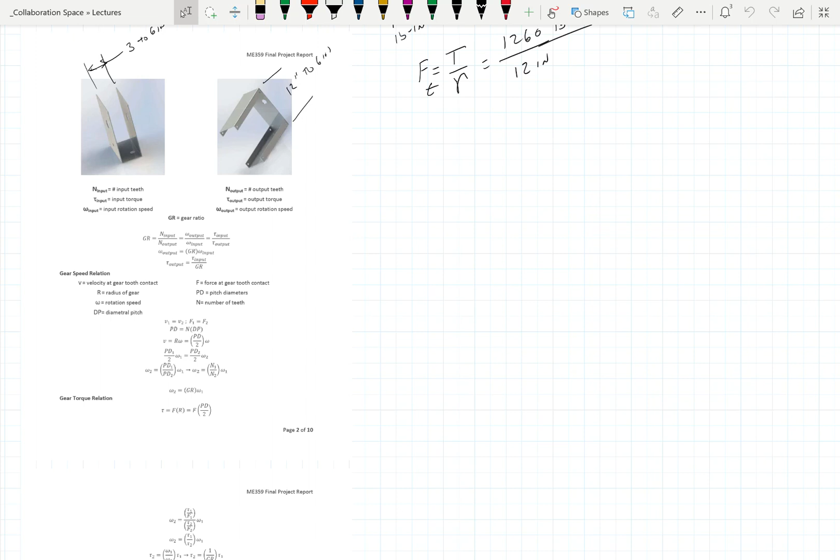I want to do a class like that. All right, so we're good, we got our force. Let's go back to the picture here, so we're working on.

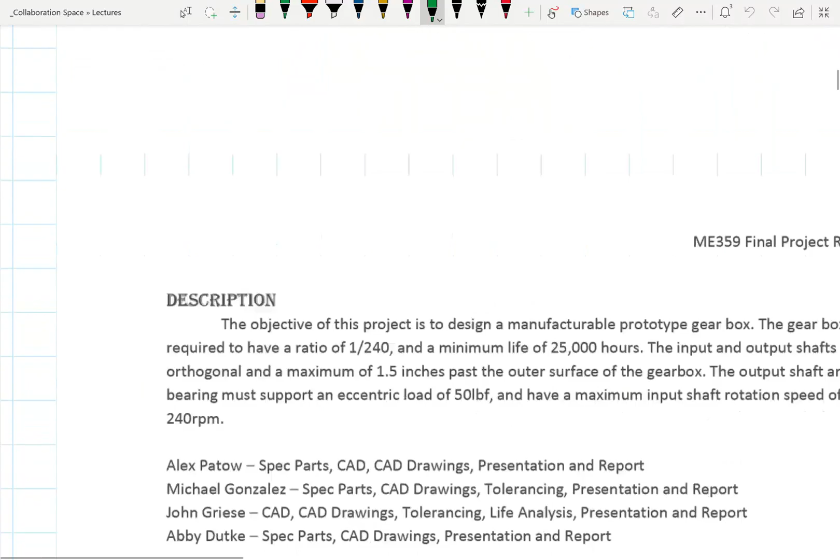Whoa, where'd you go? That was fun, so we can stop it. Spreadsheet's doing something too. We can chalk off that gear, we know what we're going to do with that now, right?

Okay, we got to come up with a bearing. Actually, we got to come up with 2 bearings, one here, one there. That also means we got ring grooves to worry about.

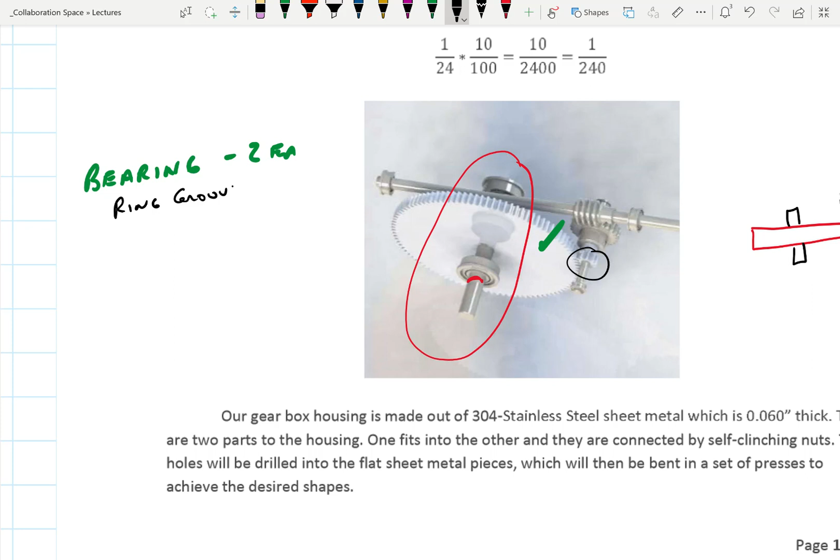The gear has a key and probably a set screw. Actually, I don't think that particular gear did. Didn't, no. Oh, that would suck. What else is missing here?

And then we got the shaft design. We're still at just kind of picking general sizes of things. We haven't gotten to calculations yet. We've been toying around a bit with calculations, trying to figure out the pitch diameter and diametral pitch and number of teeth, but nothing really towards the design itself.

So the next piece would be... okay, who keeps pinging me?

No keyway, no set screw. No keyway, no set screw. How do they plan on putting that bloody thing on there? On the gear that we picked? Yeah. Well, let's just put a keyway in anyways, because that would just be horrible otherwise.

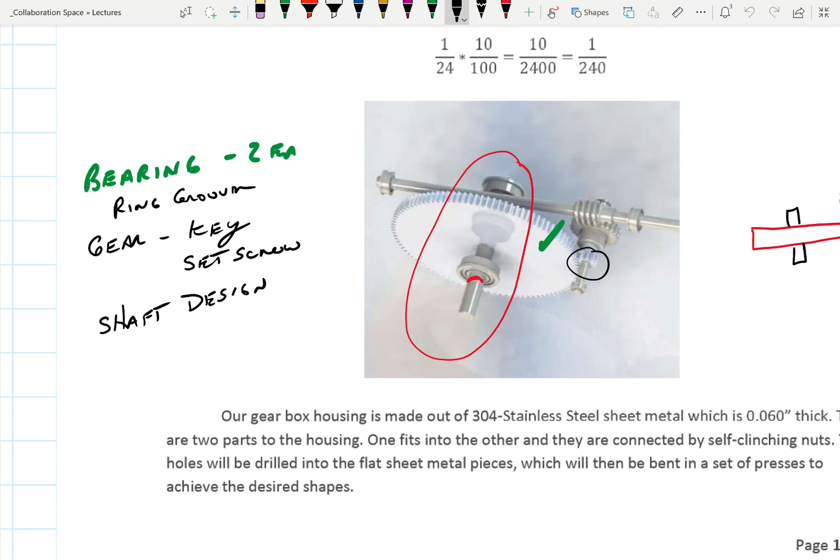How about that? Okay, so basic assumption on a gear. Somebody write this down, better be me, since everybody on the other end can't see anything. So, where are we here?

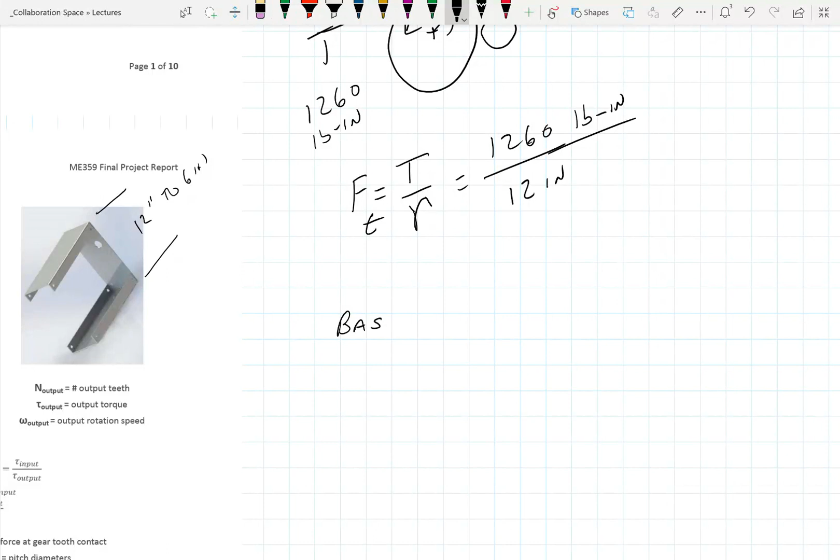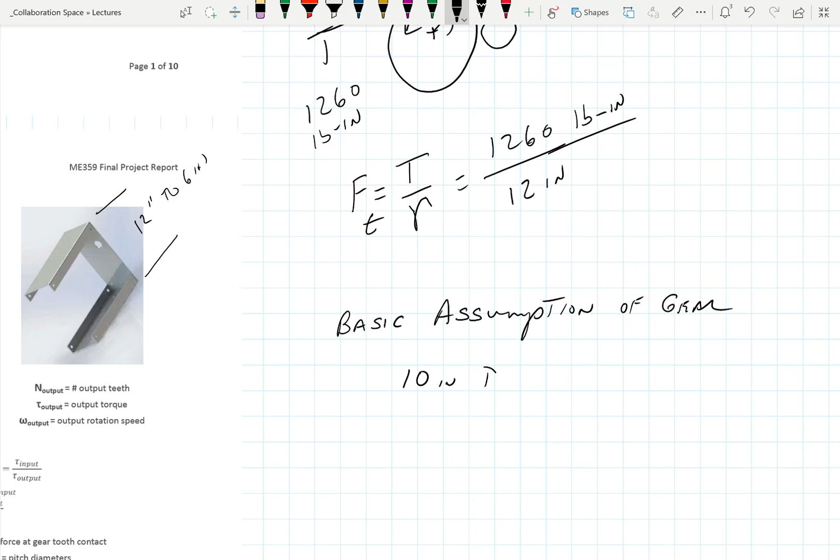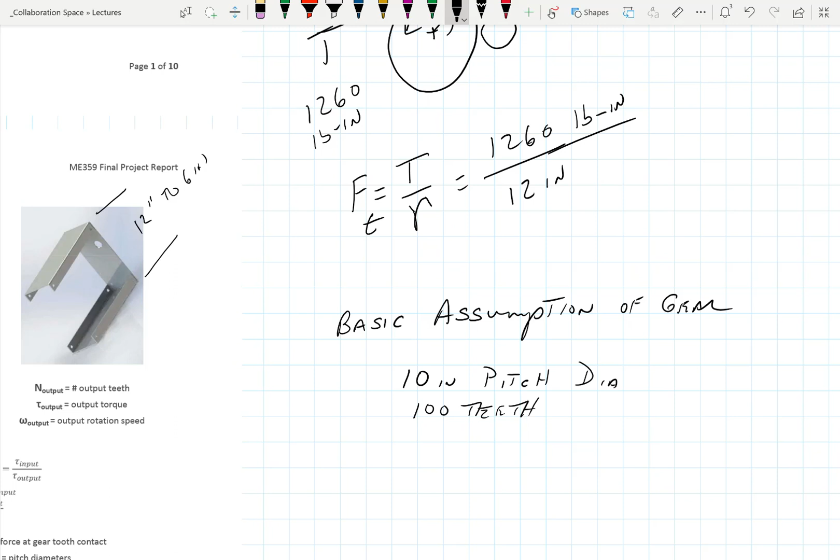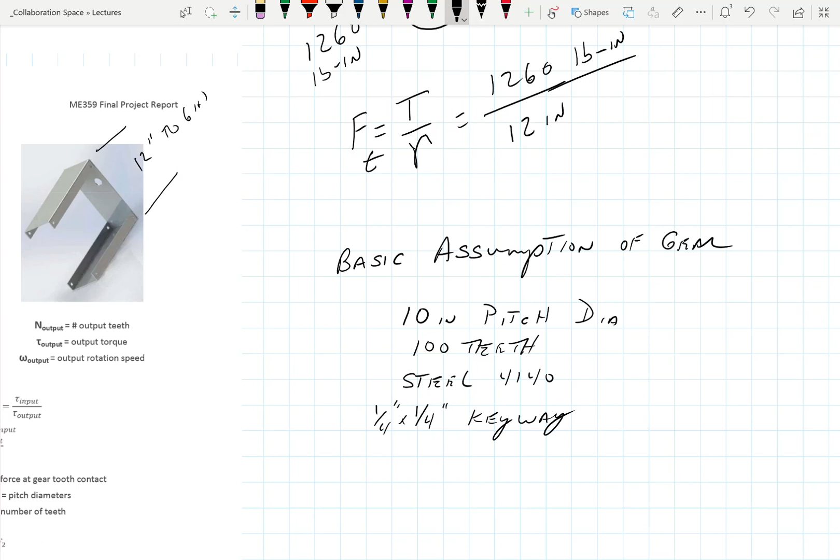Basic assumption of gear: 10-inch pitch diameter, 100 teeth, and it is steel. Let's make it 4140, probably a waste of material, but let's do it. It has a 1/4-inch keyway, actually 1/4 by 1/4. We'll pick a key to go in the shaft to hold it in place, and we'll make some other decisions along the way, but so far good on that assumption for the gear.

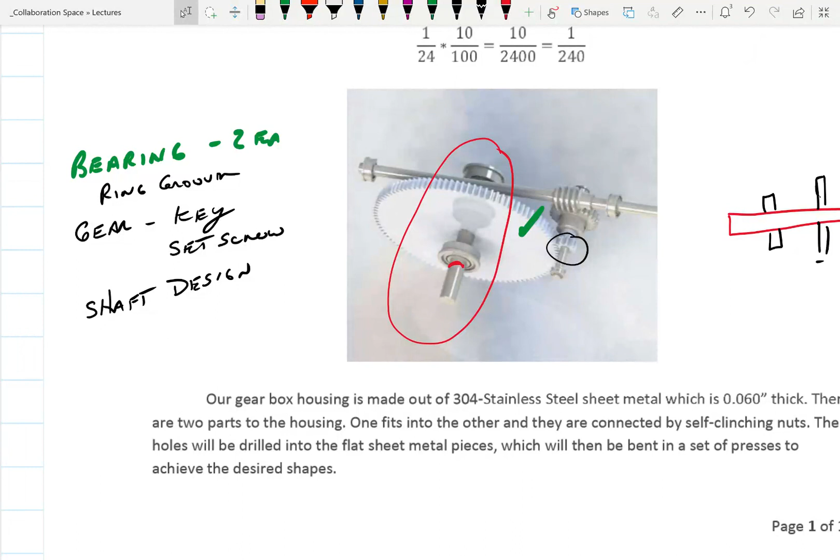All right, so we are on bearings. Did we get a shaft diameter on that gear, didn't we? Yeah, we did. Let's see, it was 1 inch, I thought, or 1.25 inches.

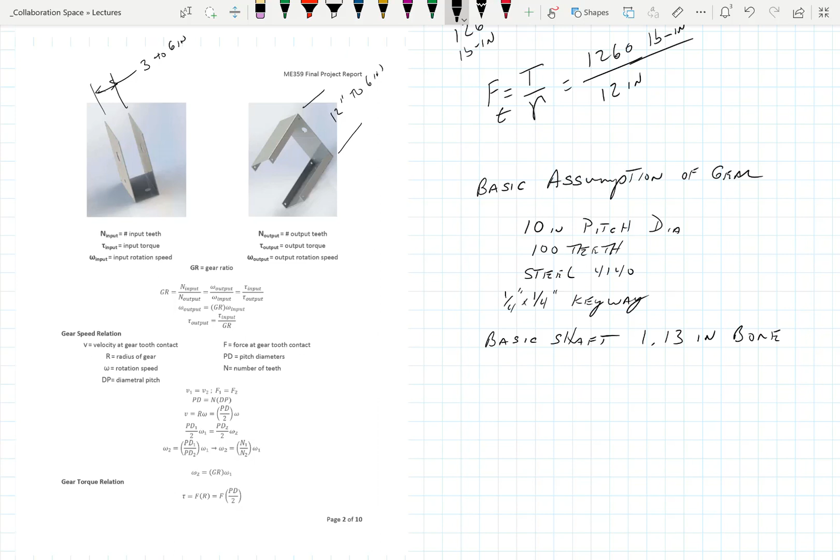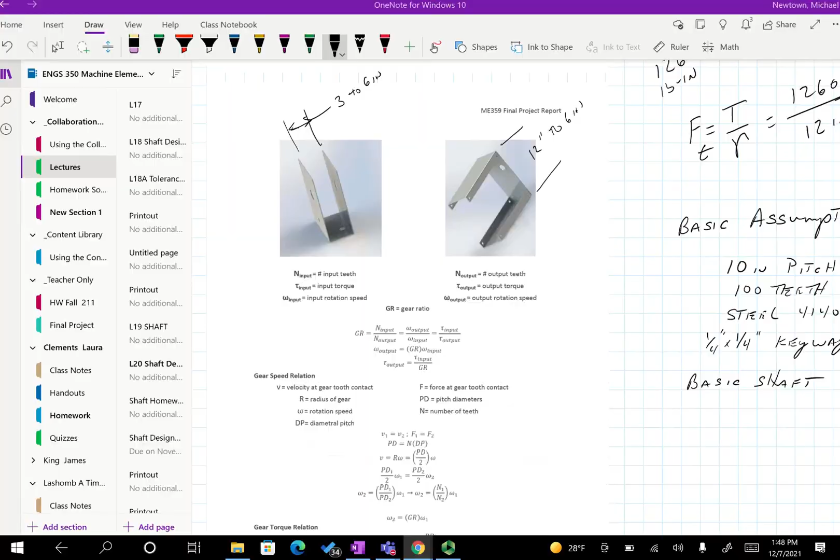Cup diameter, did I hear that? No, it'd have to be the shaft diameter itself. Maybe they don't give it. Bore size 1.13 inches. 1.13 inch bore. You want me to bring it up? So if you go back to that combination.

I think we're doing the YF 100 is what we chose. We're assuming it's made of steel instead of cast iron. So why would they use cast iron instead of steel on a gear this big? Because I noticed as the gears got bigger, they switched.

Cast iron has really nice pourability compared to other materials, not as nice as bronze or something, but the other steels, because they're a mixture of things, tend to have to be picked at certain points to get it, whereas cast iron is a uniform homogeneous substance, so it flows nicely. That's the basics I remember from that, so I could be all washed up with that, but...

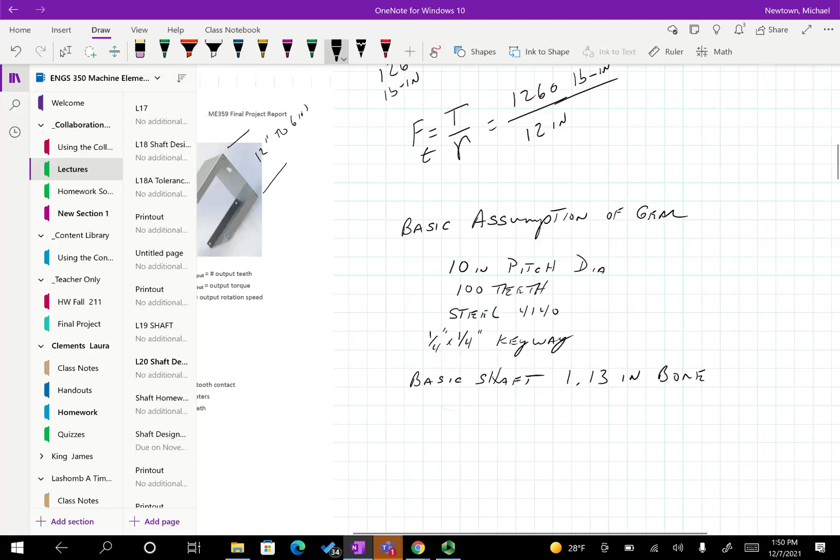So, all right, why'd they go out here? What type of steel did we say we were going to make this? 4140, that'll give us the strength we need. All right, anyways, back to here. So that's our bore diameter, which is from our fine friends at Boston Gear. So really got our first shaft diameter estimation. So you kind of see how this starts playing out. We keep going.

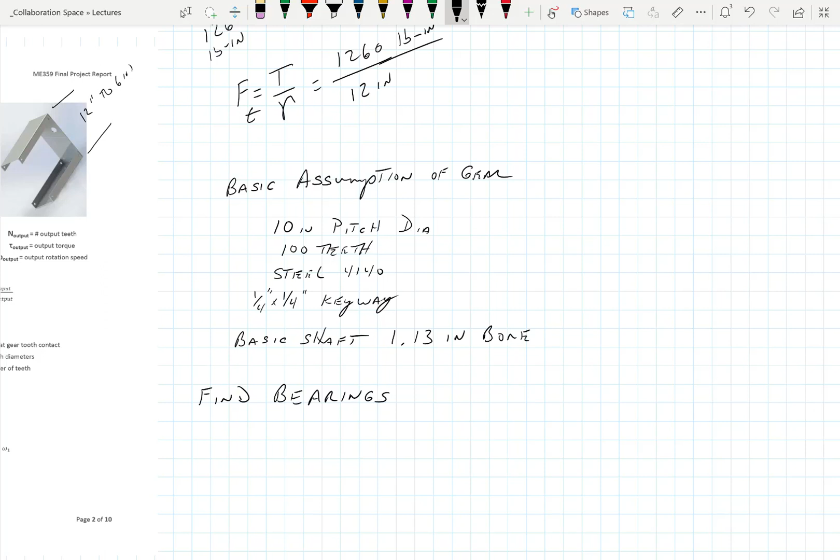So we need to go find a bearing. I'm guessing we could just assume pillow blocks since they're the easiest to use and most common. Not in this particular case because we got to put this in a housing. So we're back to, I actually took those little bearings away, but we're back to picking some of those sealed bearings. So let's go to e-catalog.

And bearings. That no signal gonna be on the level? Where, on the center of the... Give it a little tap and it might go away. We can just ignore it, work around it. Join the Teams chat, that's what I did. Join the what? The Teams call. Oh. Either way, that's just weird. Yeah.

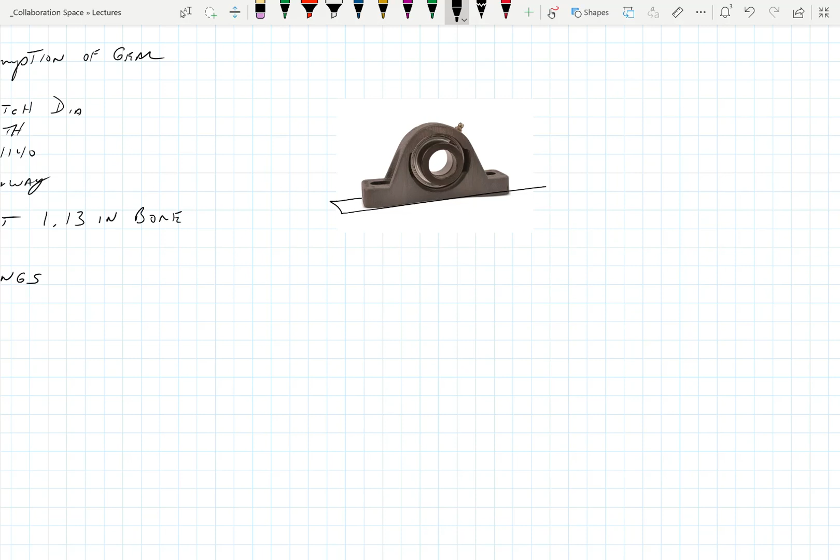So if we do this bearing - if we use this bearing right here, then we're going to need to design something underneath it that holds that up. And from that center point there to here has to be greater than 5.5 inches.

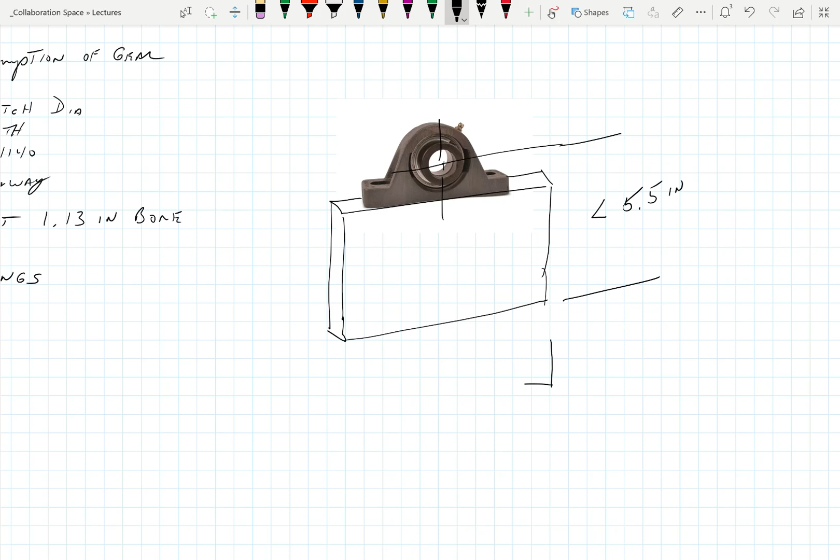Okay, so that we got room for the gear to work. Okay, so that's kind of that. Now you could build a housing that actually was something like this, where we had a bearing cup built into it. And let's do this kind of like that, okay, where we put our bearing in here. That has got to be the shittiest drawing I've ever done.

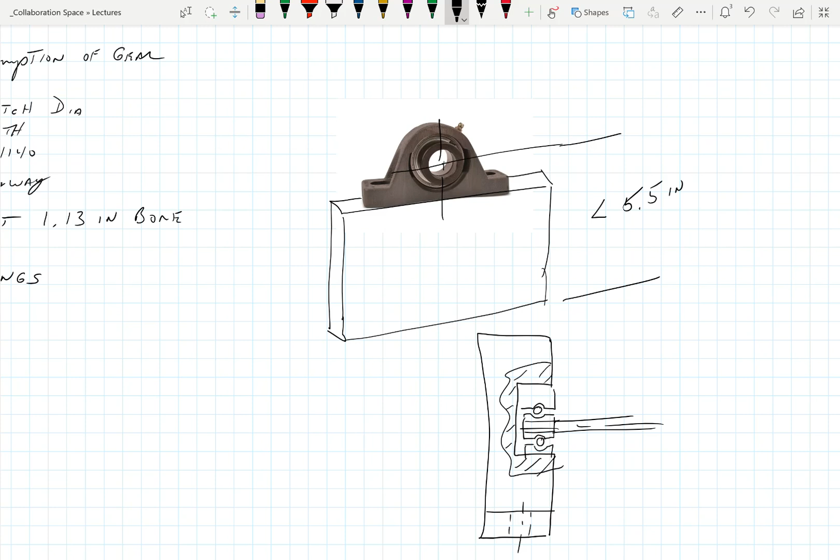And our shaft's running out through there. So basically, we build that little end cap for the device. Okay? Make sense?

So we've got to make some choices. They didn't really specify any in their design. So a pillow block might work. That's one thing to keep in mind. Let's go do this, though. Let's go back to...

Yeah, we'd have to bore it on the side, and the shaft sits in the end of it. Yeah, so that's doable too. So what makes these better or worse, I guess, is the hundred dollar question, and could they be used?

These are bronze sintered bearings that have oil impregnated into them, so as they heat up, the oil film... and I still didn't look up that word for the study of oil and how it behaves. So it'll come back to me. Well, it just did come back to me, but it'll come back to me after the class is done. I won't need it.

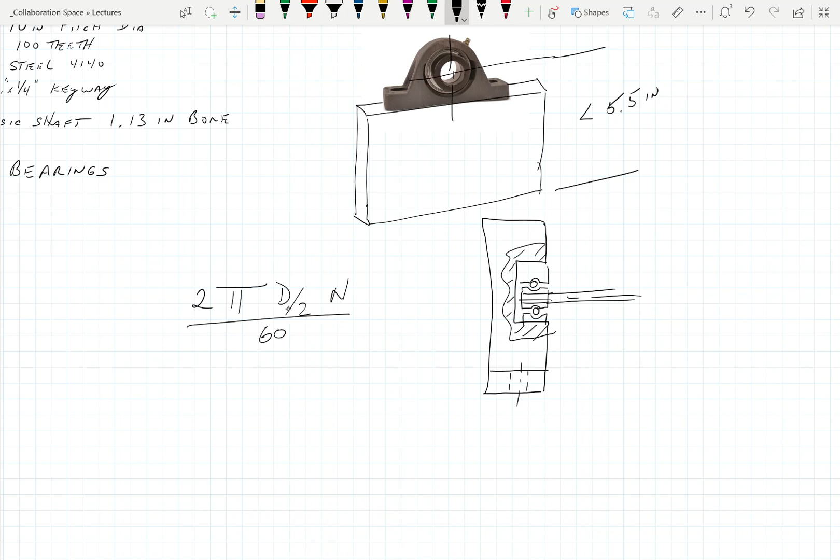So circumference is equal to 2 pi r. 2 pi d over 2 is pi d, which is still the circumference. And I take the circumference and multiply it times the RPMs, n, and I get inches per minute. Does that sound like a velocity to you? Sure does. I'll divide by 60 and convert to seconds, just per second. Right, so we want to get it in miles per hour, so you have some perspective on this. Do it, let's calculate it. Give me a number. That is annoying.

262. Yeah, that's what I got - 262 inches per second. Okay, so inches per second to feet... let's see, I wanted something that you're familiar with.

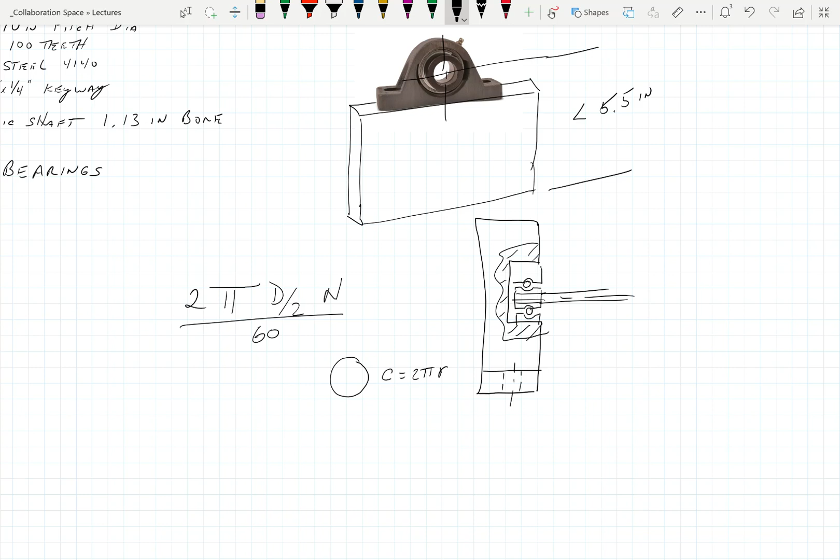All right, so we got to go back to Boston Gear and look up some specs on the bearings. Most of the ones I'm looking at, I haven't put in sizing yet - I'm just looking at the bearings in general. A lot of them seem to be able to take 1,200 feet per minute. Okay, so you had 22 feet per second - what's that per minute? 1,320 feet per minute. So it's about 100 too much.

So for the bronze, for most of the bronze, I haven't put in sizing, but that's kind of what we're using to make some choices here. See what I'm saying, Tim? So we're about 100 over, you said? Yeah, we're at 1320, and the max velocity is 1200 feet per minute for oil sintered.

Let's go back and take a look at our other friends here on the pillow blocks. I'll just pick one. Not seeing any max velocities in this - I don't even see any details. It's just supposed to be it will take everything, apparently.

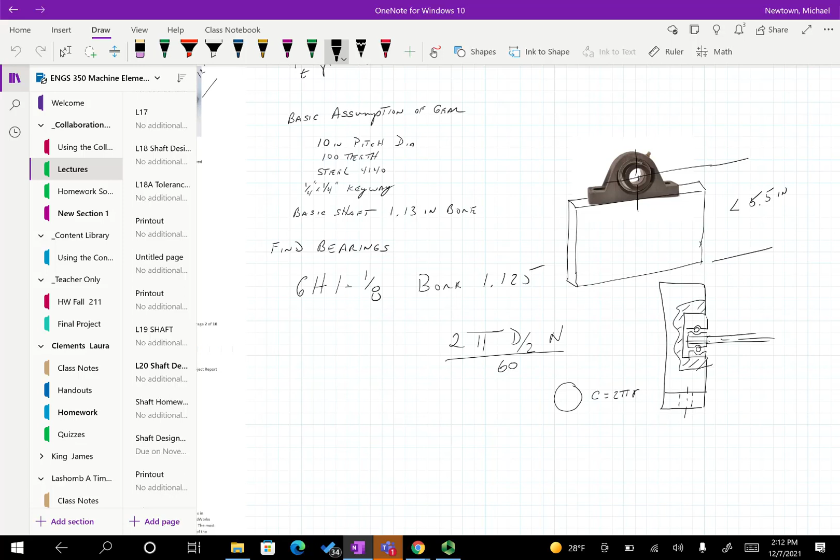Okay, so we got our bore, we got our bearing, we got our gear. What was the model number on the gear, do you remember? The gear was the YF100. YF100 is our gear.

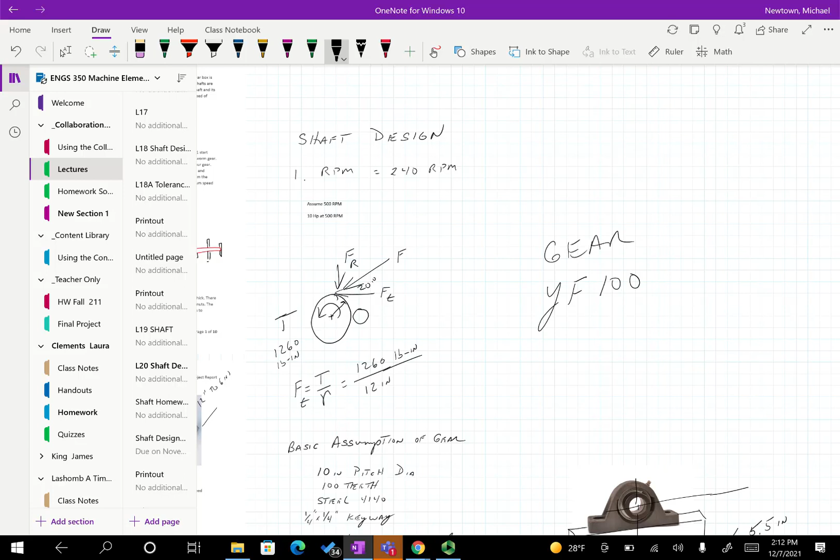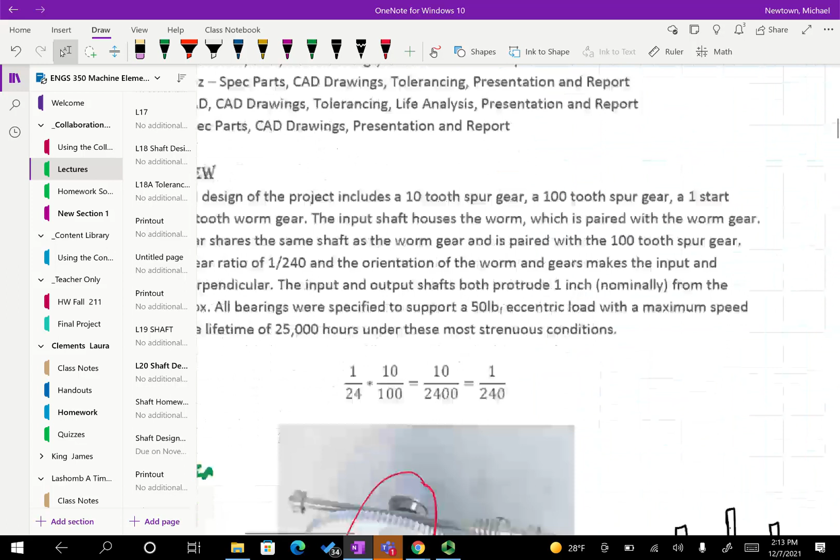Okay, cool. A nice thing too about a pillow block is we don't have to put a ring groove in to hold the bearing in place, and we probably do not have to worry about - what am I thinking here - thrust bearings. We don't have a need for a thrust bearing.

Okay, you probably want to do a shoulder still, right, and not do a ring groove, or... Well, we gotta think about some of that. So we good so far here? What did you say? The fillet. Yeah, essentially create a good shoulder on it.

So the bearings on the inside. I think personally we got all the general details of what we need. We don't really know what this outer housing looks like other than they specified it was a piece of sheet metal. But what I'm really interested in is we can design the shaft, select the bearings, put the gears in, and all that sort of stuff.

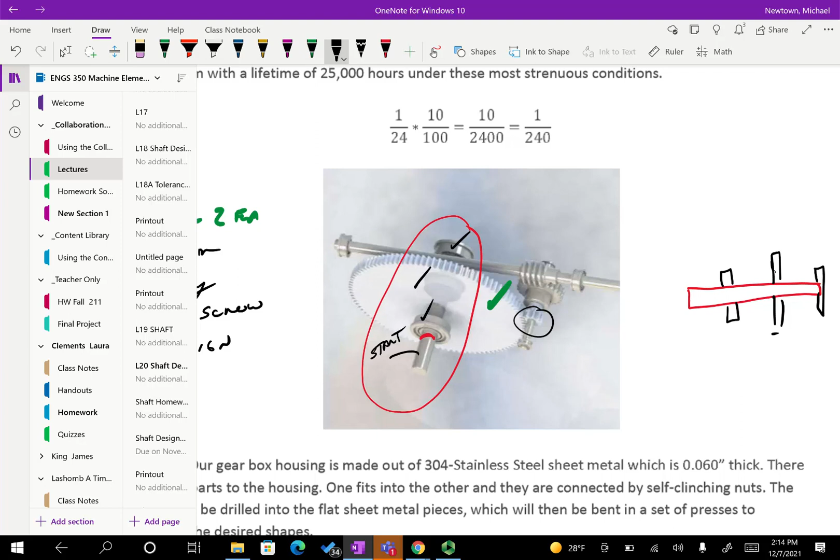So you wanted us before to also find the small gear, right, the pinion? Yeah, we could come back and work on this one if we got time. Let's get this one done. Okay, so if we can design one shaft, one gear, and the bearings, we've accomplished this semester's goals.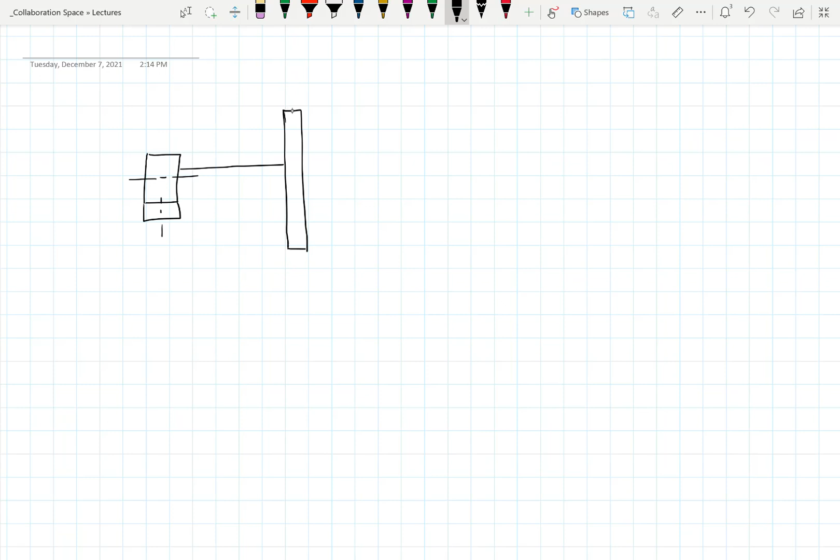Alright, so let's do this. Let's set this up. We have a pillow block. And as long as I'm having fun here, let me teach you some basic sketching stuff.

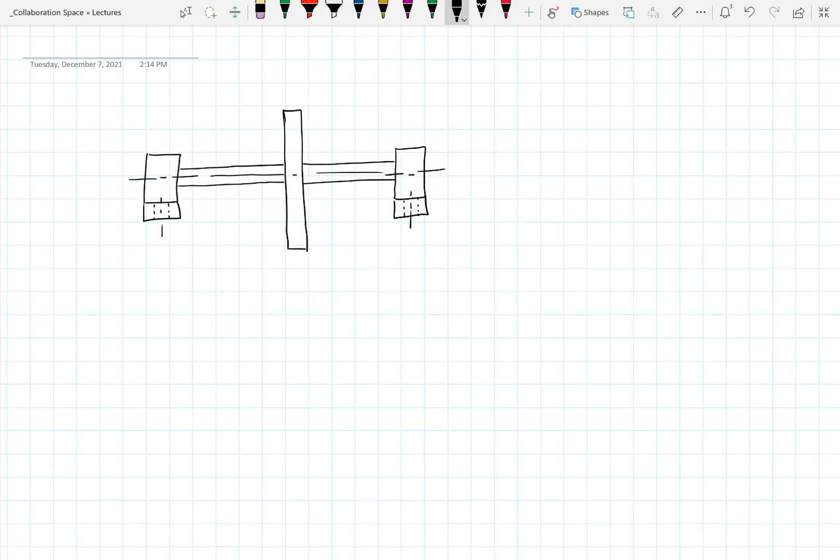Alright, so when I draw a gear, it looks just like this, except what I do is I come up here and go like that, and that represents schematically a gear because that is the pitch diameter circle. I noticed a lot of drawings do two X's.

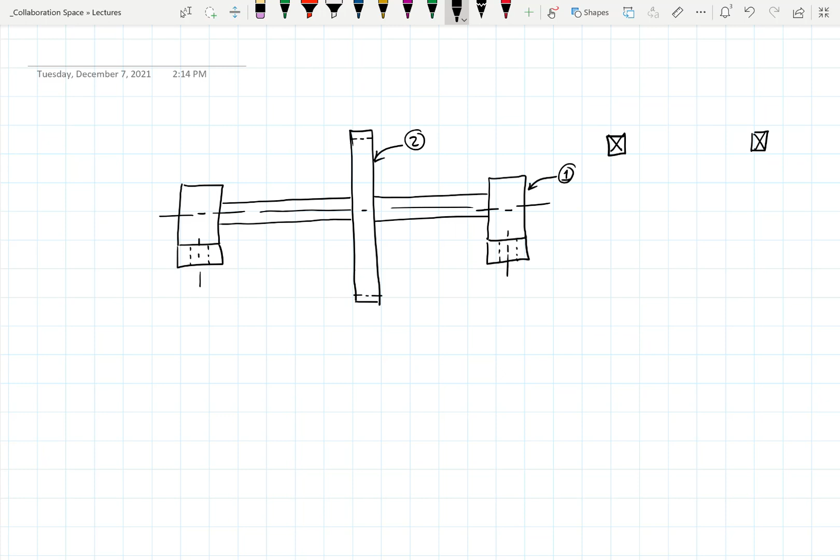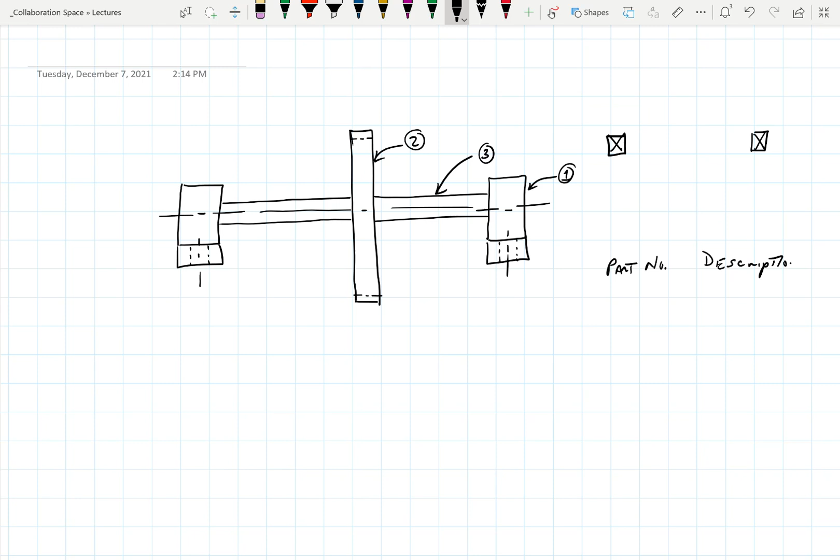In this particular case, I'm going to specify we got a pillow block. So we'd want to do part 1, part 2, part 3, and we'd want to start over here with part number, description, and then we do quantity and whatever else we need.

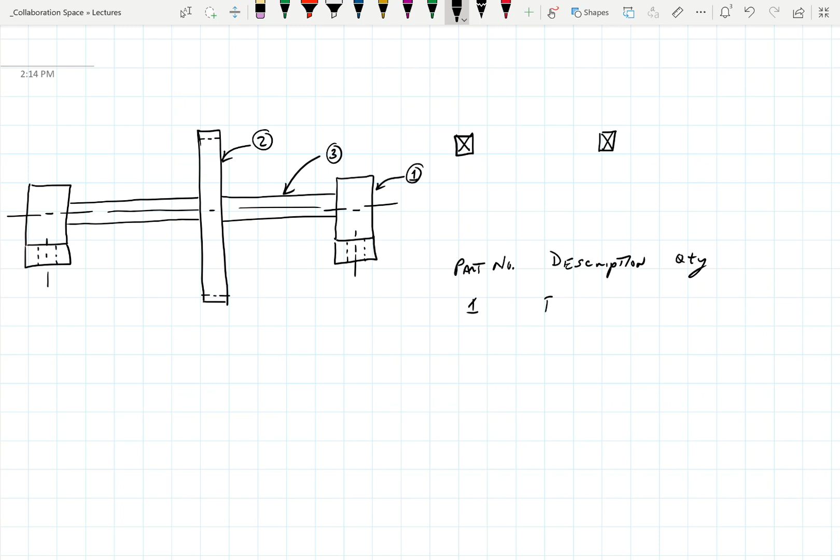But right now we're just going to do part 1, description, pillow block. It was what number? For the pillow block? It was 6H, 6H1-1/8. And then we need 2 of those.

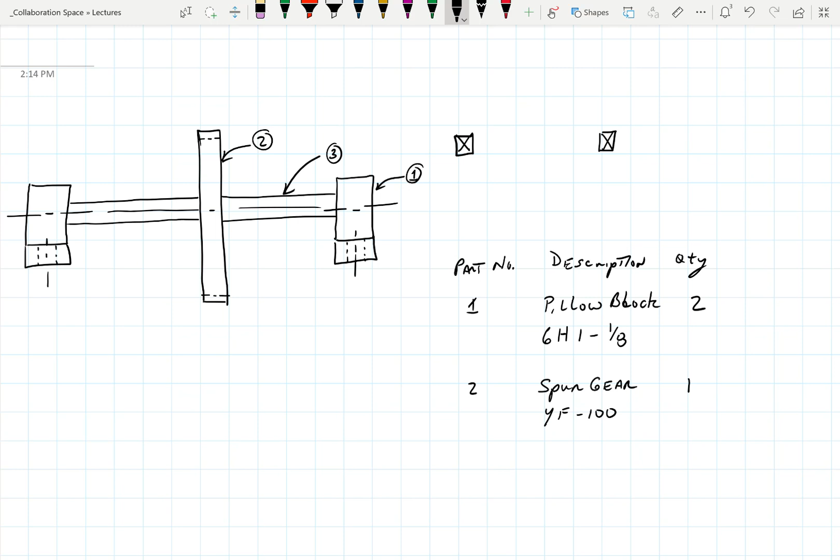And then 2 was the gear, actually spur gear to be the appropriate name. And its nomenclature was a YF100, and we need 1 of those. So as I keep going down this, we're going to keep adding to this.

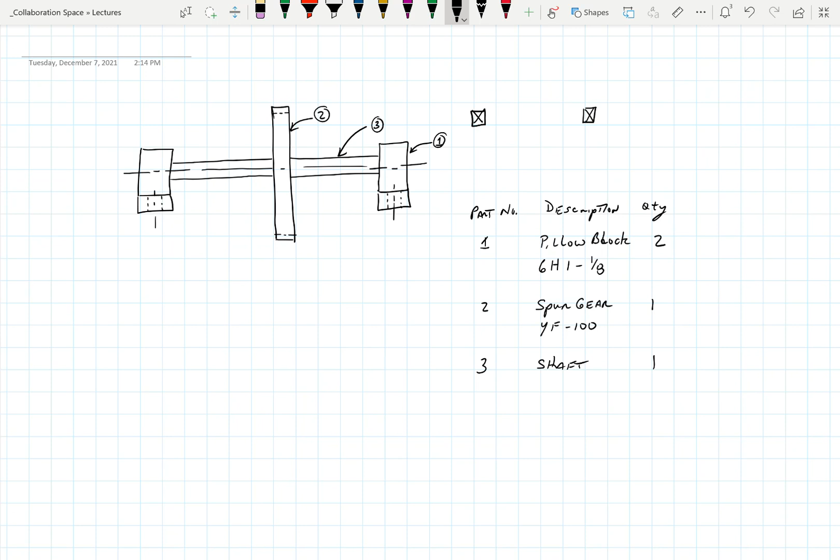And then we got a shaft, which we're going to develop here. We need 1 of those.

The shaft is something that's going to rotate, and we are driving that off a pinion. It's going to rotate this thing, and we want to know how we're going to hold it in place. So we know we got a key.

All right, so now we're going to put number 4 as our key.

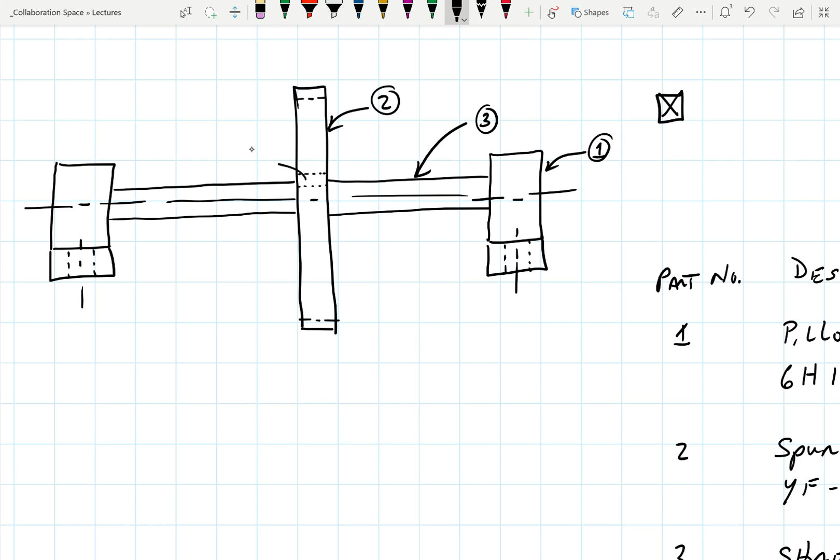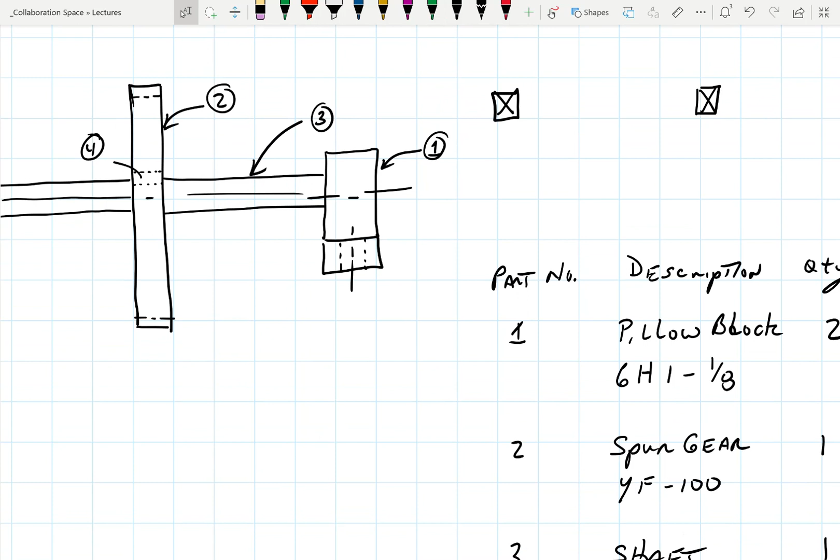There is nothing to keep this from sliding left or right on here once it's there. So we can use a couple things. If it's low enough torque, I could use the set screw on the key and the set screw on the shaft, so 2 set screws on the gear. Make sense? Or I could put a lock ring so that it stays where it's supposed to go, doesn't slide left or right.

The lock ring is like a 3/4-ish circle or something. Yeah, they have this kind of shape to it.

Cool. And you're talking for the gear for that, or for the gear and the bearings? Well, the bearings are going to stay pretty much where they are, but the shaft, we have nothing to keep it from going left or right at any given time. So if something's misaligned, it's going to slide.

It's kind of cool. I actually watched a discussion on the Millennium Bridge in England the other day, and it was as people walked, and it was more about systems lining themselves up. Have you ever seen metronomes on a wooden table? They will all start out of sync, and by the time they're done, they're all in sync, because there is a natural harmonic that goes with things. If you set things so they float and can move, set 2 metronomes going in time and one out of time, these 2 are always doing this. One rolls to the right and left, and the other one's rolling left and right. So it's opposite, but what will happen is they'll become half sync out, and this one will actually start to change its frequency to match the rest of the table.

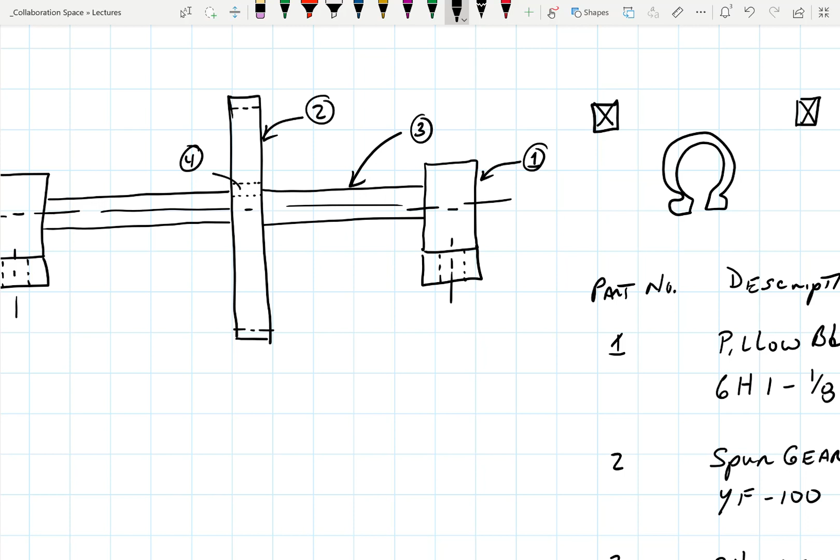Okay, so is what you're suggesting this? And that's the shaft? Yep. Yeah, that's pretty much what I was thinking we could possibly do, because then it can't really, I mean it would have a little bit of wiggle, but it wouldn't be anything drastic. Right. So, and then we got a keyway right here.

So the interesting thing with that is we can keep the shaft basic size and step the bearing ends down and find a different bearing. Right, so the chances are we could find a 3/4 inch bearing. Yeah, okay.

Now what? What's the next thing we got to worry about? So I got a key that'll keep the gear rotating with the shaft. How do I keep the gear in its rightful home? And that's what I was thinking, we need those lockers, the lock rings. Yeah, so we need some ring grooves around that position.

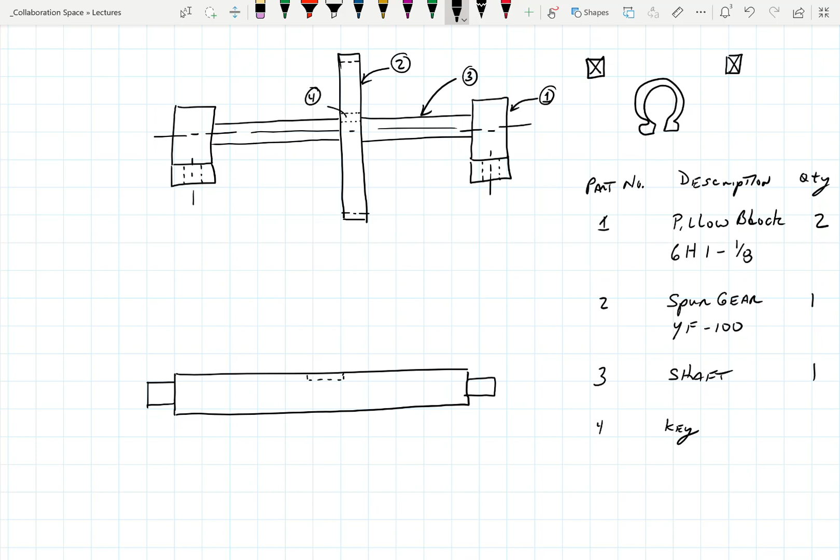Right, okay, now let me ask you another. Okay, so next addition here, so we're going to put ring grooves in to hold our shaft in there. Okay, so what if...

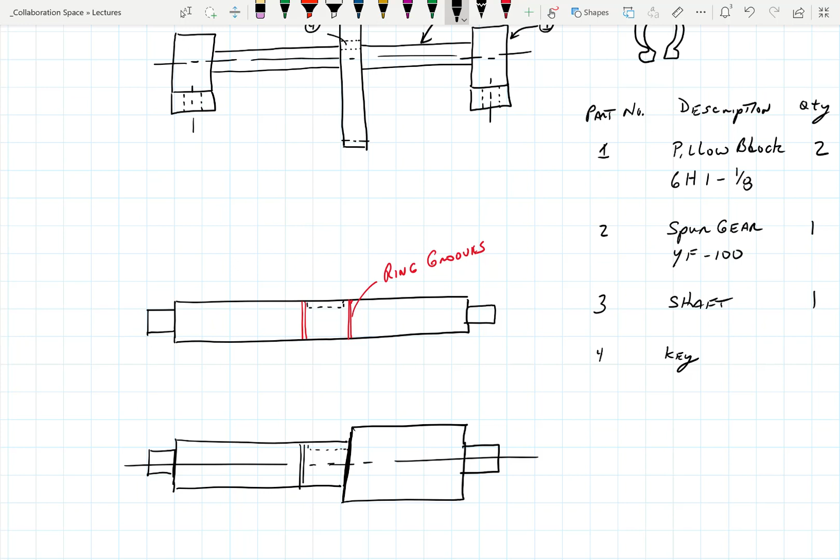What if we did a step shoulder there? Save you from having to buy the locker. And the other thing, if I take a look at the gear hub, so let me really practice my...

You guys missed it, was it last year? Or was it in Strength of Materials last spring? I can't remember. But I started laughing because someone was always asking the question about why do you do all that sketching. It's because it's engineering artwork. So I got the point, I was just going, hey, I'm going to do some engineering artwork.

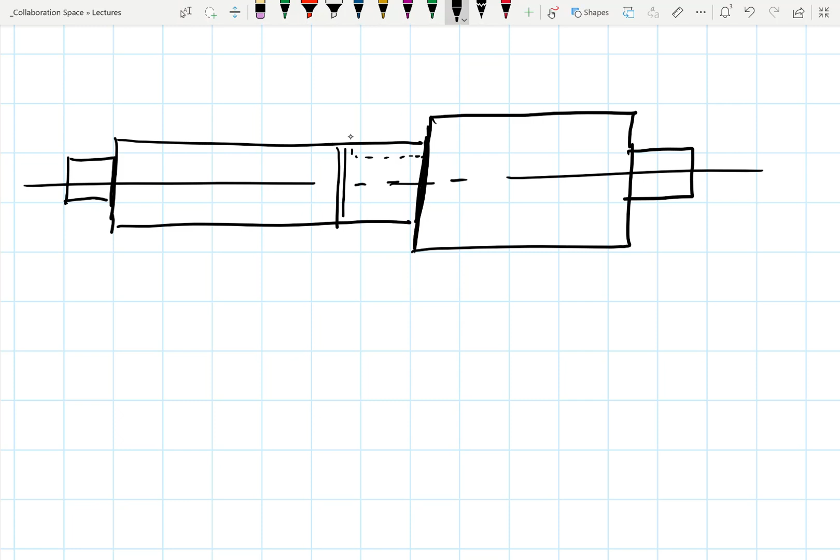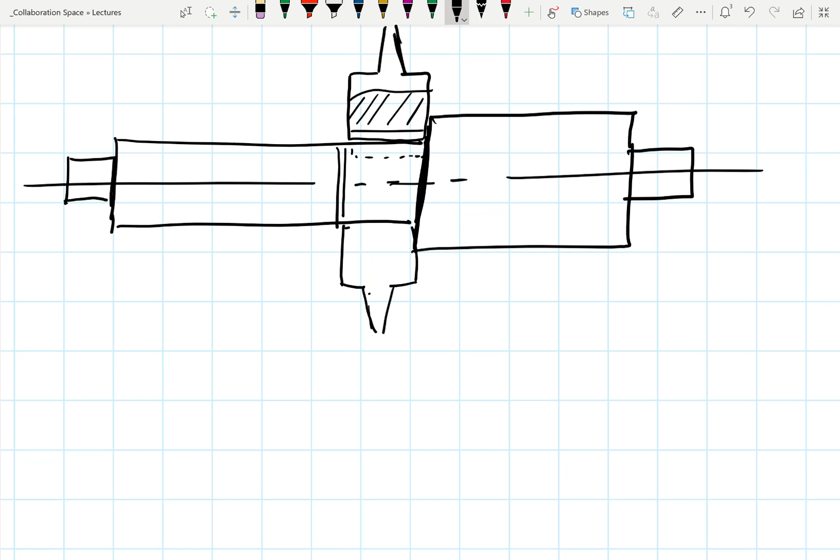So we got a hub like so, going up, and whoops, we got to have a keyway in there. So out here someplace is the rest of the gear, but there's the hub. So we could put a...

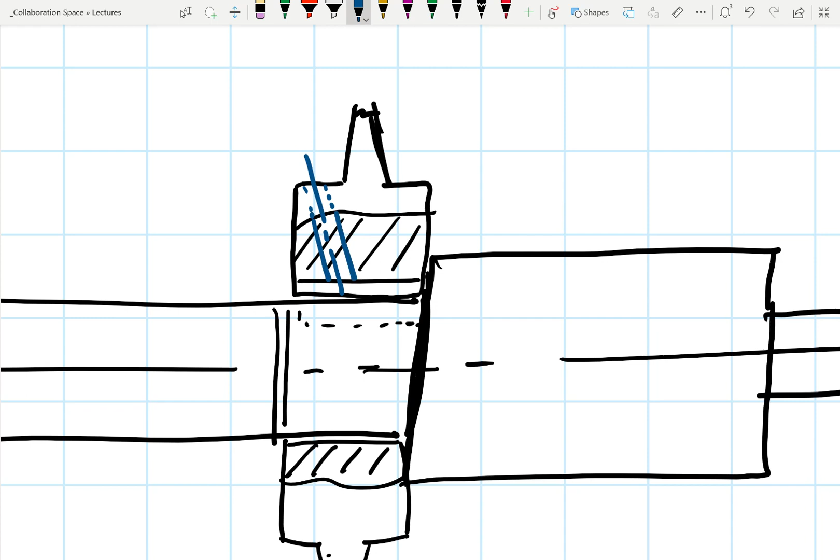Yeah, let's do this in something blue. If we wanted to lock this in, we could put a set screw in here that pushes down on the key. Okay, and that would keep us locked against the shoulder.

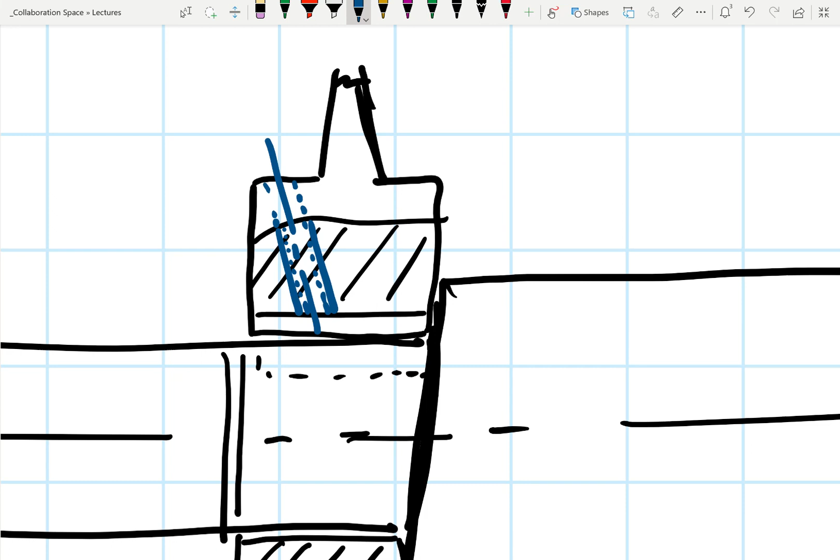So let me ask this question, and this is where the fun comes in choosing what you design. If I can guarantee that set screw is going to hold that onto the key and push it towards the shoulder, do I need the ring gear or the ring groove? Probably not. Okay, is it going to be stronger with the ring groove or with the set screw? So we've got to do some calculations at this point.

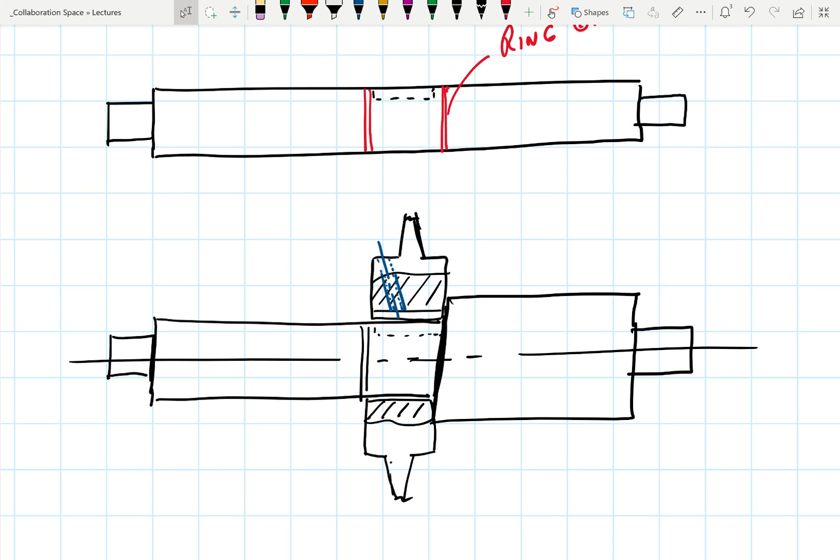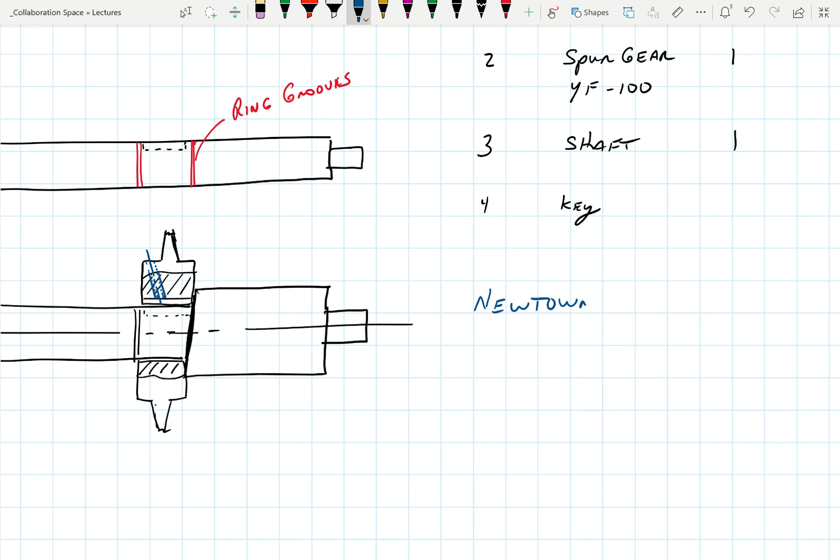Yeah, okay, now here's the thing that I'm doing to you without you even realizing it. I think I missed an O in there. I did, didn't I? Philosophy.

So, create 3 designs and then check them all. But maybe out of those 3, you'll find a 4th one that pops out and says, oh, I never thought about that one. And then I guarantee you'll always wind up with a better product. It's the bad designer that just takes the first one and runs with it. Did you look at any other potential problems? No. Well, there's probably some that you need to look at.

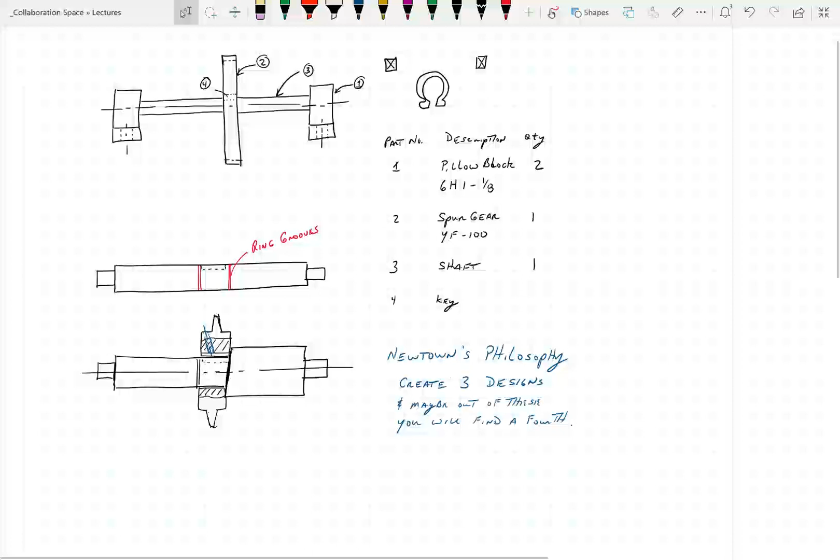So, we are getting really close here. All right, so we know we got, well, literally, design 1, design 2, design 3. Is there any of those that really strikes you better or worse?

And you've probably all suffered a little bit with Dr. Craig in decision matrices. Also quality? No, I don't know. No. He's always, not that he's wrong, it is the way to go, but he tends to put that on everybody for projects. We haven't done any, honestly, this year. So usually what you try to do is you weigh these against something that's customer specified.

So for instance, Tim, let's say you were the customer and you decided that we needed a shaft that was 1 1/8 inch. Have we met that? Yes. So we go over and we put a 9 in that box.

Okay, and I use a little weird system. I use 1s, 3s, and 9s because they're an exponential growth, and to me it makes things that are really important way out faster, and those things that aren't so bad just drop away. Some people use 1 through 5 and try to rank them that way, depends on where you learned it from. The guy I learned it from was exponential. Mike, just do it. It's like, oh yeah, okay, I can do it.

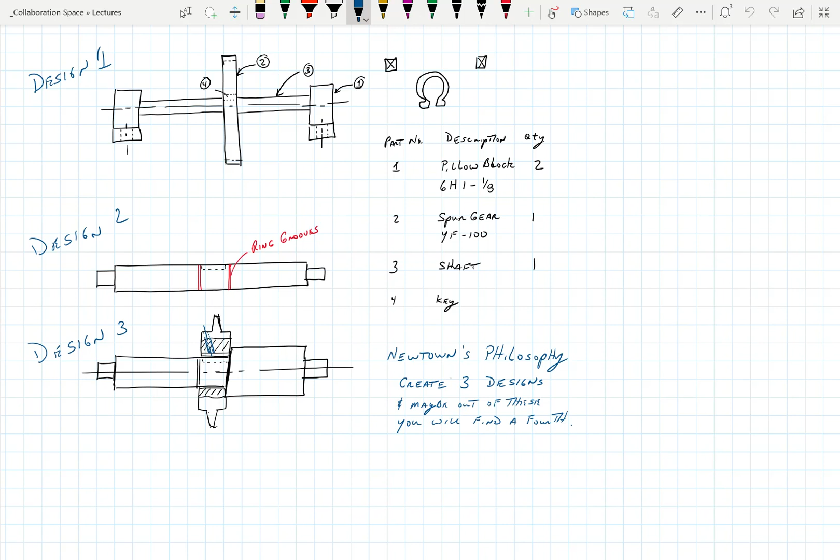So, Tim, give me another specification that you might want it to do. Longevity. Longevity?

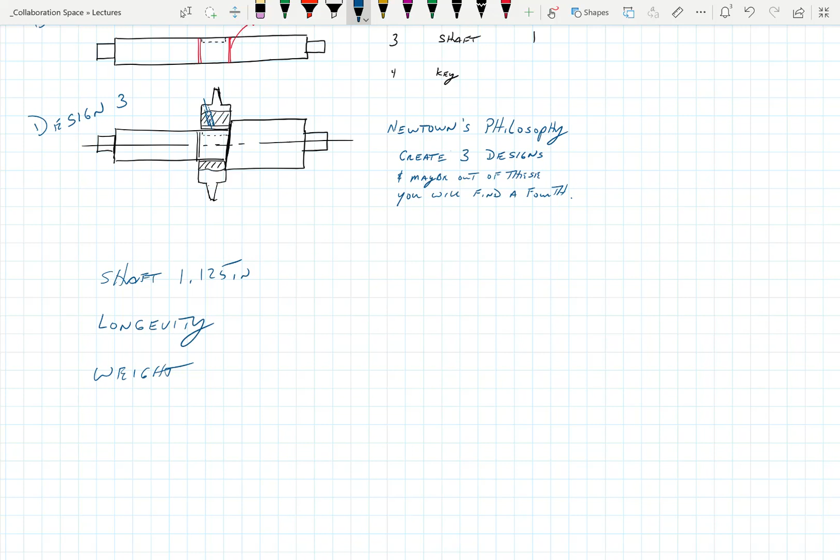Weight, maybe? Okay, we got weight to deal with. Maybe it starts and stops a lot, so that the 3rd design would be bad, it's harder to start. Shaft would be 1.125 inches. Weight? If that size, then design 3 wouldn't work just because the gear's bore is already at that size. Yeah, but let's just assume right now. Give me some other parameters here, from the project spec or things that...

Does it need to be self-lubricating? Use and maintenance. Service hours, how much it's going to actually run for. That's your longevity, but I like service hours.

Okay, what else? Actually, I'm just going to do lubrication, and we'll specify by self-lubricating. If it has high importance, we'll give it a 9. If it's not auto-lubricating, if it's something we can grease, that would be the 9. So we'll make a decision there in a bit.

Longevity, lubrication, weight, stock parts. Because if I can do stock parts and I don't have to make a bunch of stuff, it's cheaper for the customer. So then we get down to final cost too, which would be one. Not usually the one that in an engineering scheme I'm worried about, but it's something to do with that.

Okay, let's just play with those for a bit. So we've already decided that a pillow block would work, but we did look at bronze oil impregnated bearings, right? So those are kind of self-lubricating. So we already know that if it's self-lubricating, that's a 1, and if it's manual, that would be a 9. So that kind of gives the customer's perspective on that.

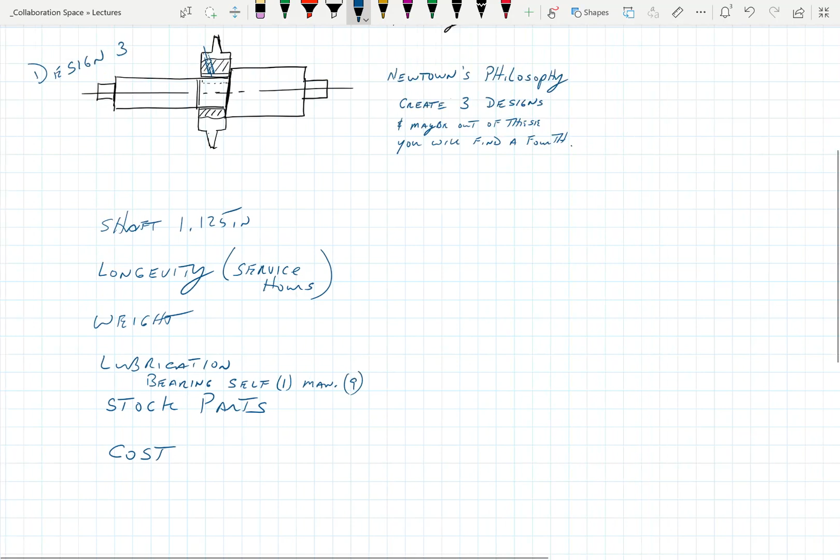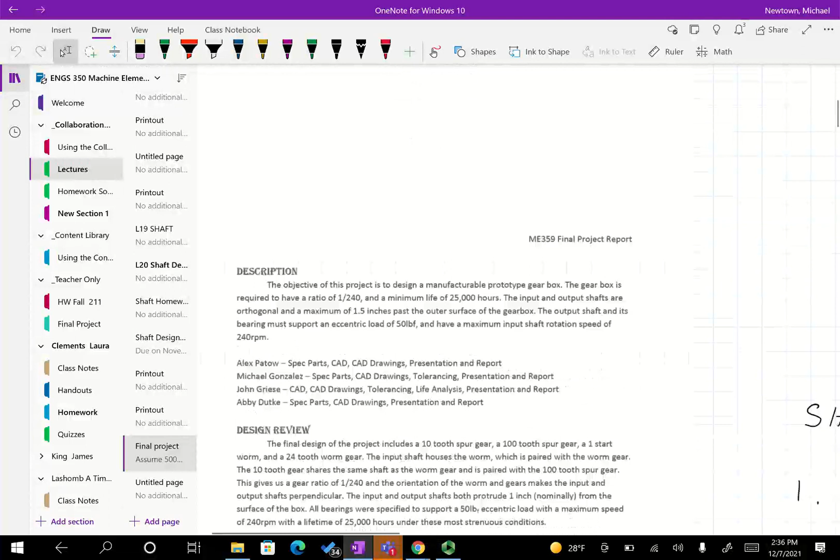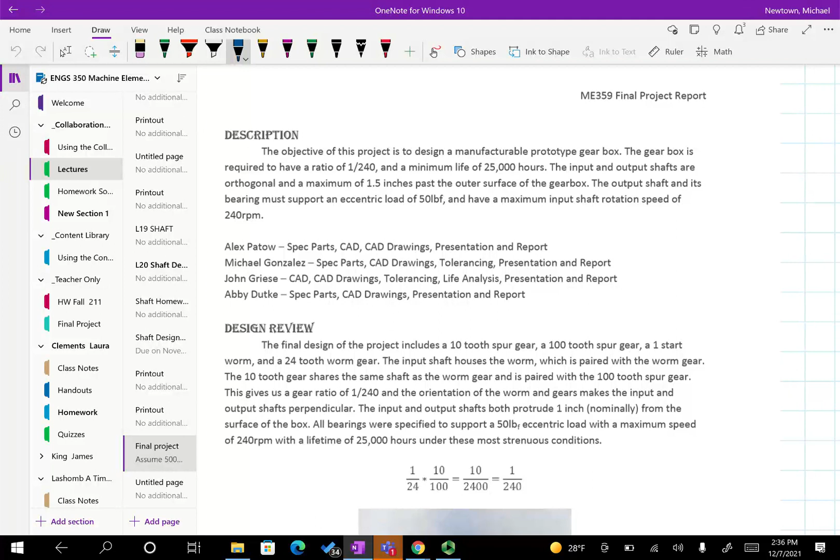Weight, high or low on the weight? Which one's going to be the better one? It depends on use case. Does it matter? Because I'd say if it's going to be running all the time, it shouldn't matter. Well, are we talking about weight of the whole system or the load on the system? Well, all of that. Because if we're talking about the weight of the system, you know, the gears and the shafts, that's not that hard to account for. But if we're talking about the load, then that's a pretty big deal. So we got bearings that need to support 50 pounds eccentric loading.

Okay, so that's something they gave us, that's a criteria we got to meet. We got our hours, 25,000 hours. Okay, and what else?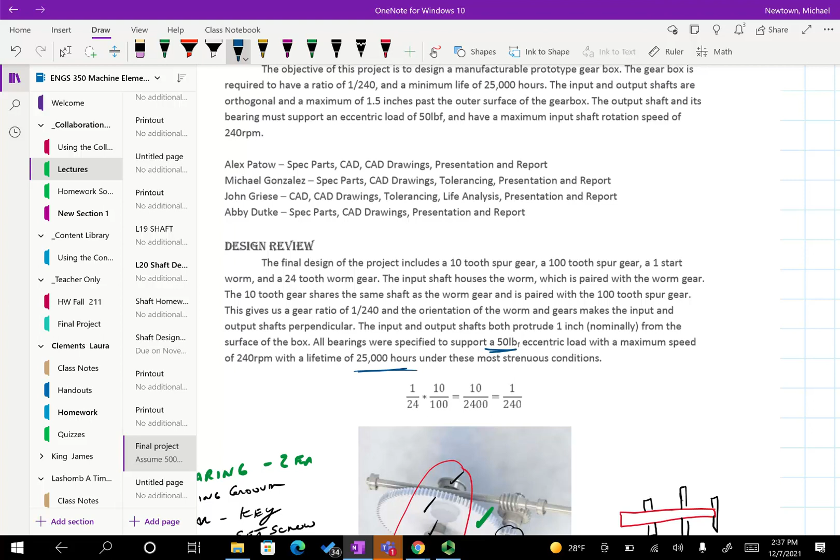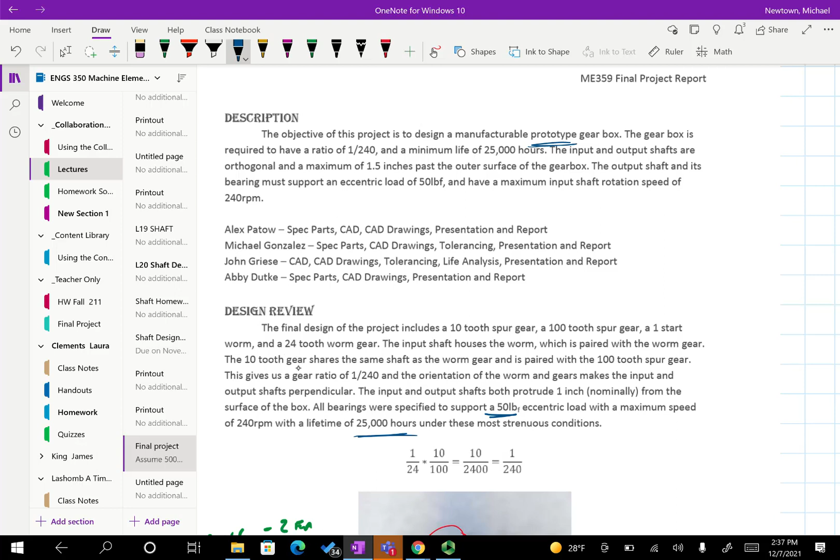It's a prototype, so we're not hung up on it - we're not going to mass produce these things, right? Right. I think that's about it.

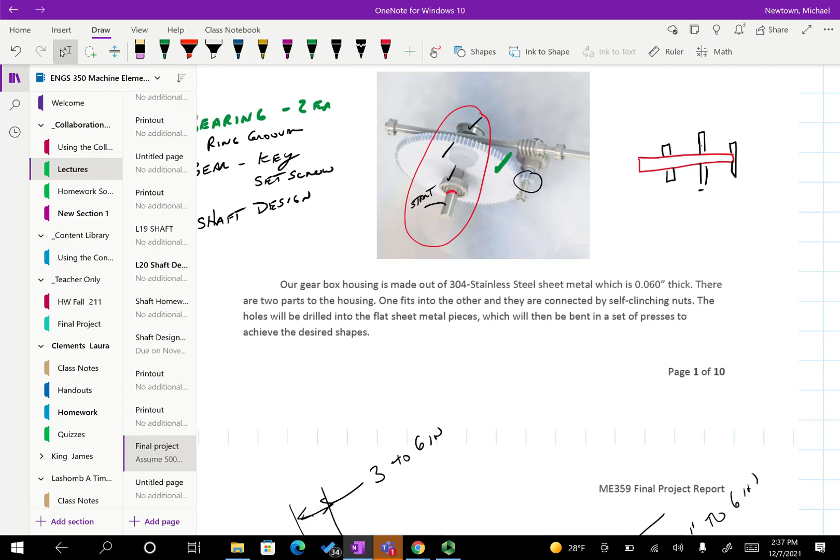So maybe the weight actually applies not to the weight of the shaft, but to the 50-pound force, eccentric loading.

Okay, all right, so what I do across this is I go design 1, design 2, design 3. Okay, let's blow this out so we can actually see everything.

So if we take a look at this, design 1, shaft - we're good, right? Oh, 9 would be good.

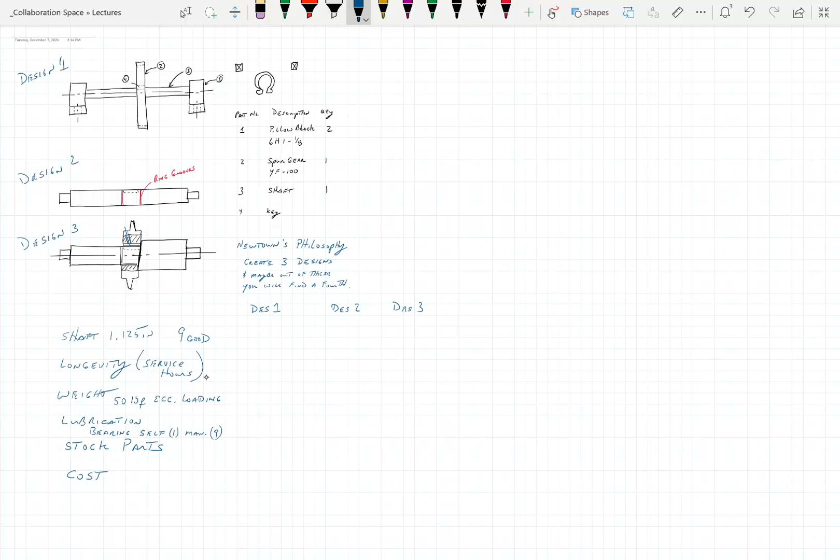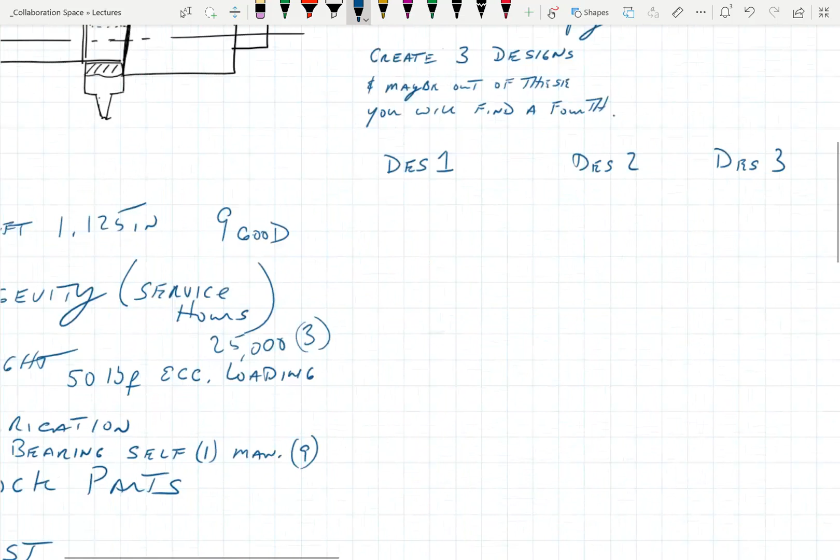Service hours, we're looking at - well, we could do 25,000 would be the target. Let's call that a 3. And if it's more than 25,000, let's do this.

More or equal to, that becomes a 9. No, more - that's less than or equal to. Jeez. If it's less than 25,000, okay, that becomes a 3.

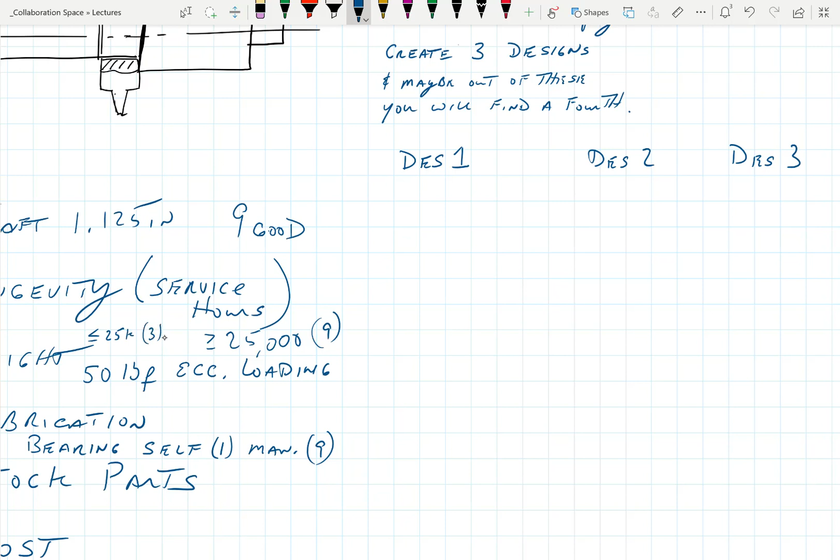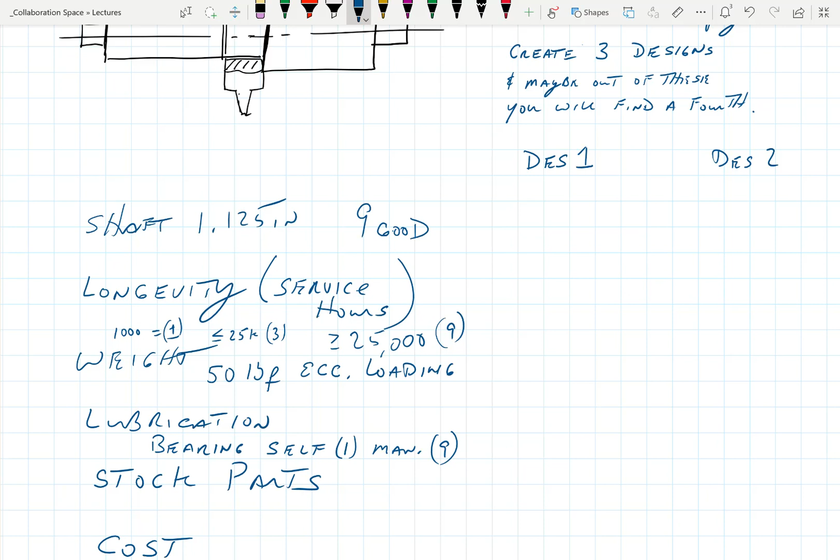And if we have some stupid number out here like 1,000, that's a 1, okay? And you assign those numbers to it. You got to give them some sort of parameter so you know what you're evaluating against.

Okay, so design 1, shaft, everybody gets a 9, right? Well, 3 would be less because - okay, so 3 is going to be a 3.

Sure, yeah, okay. Longevity - we're going to assume that they're all 9s. We'd have to actually do some numbers here, but we also know longevity could also go for just the bearings too.

Is this a rating for how well, in terms of that category, they're going to perform, or how important it is? Well, it's how well they think they're going to perform to meet the customer's demand. Okay, and along the way we hopefully take the parts that we're going to use.

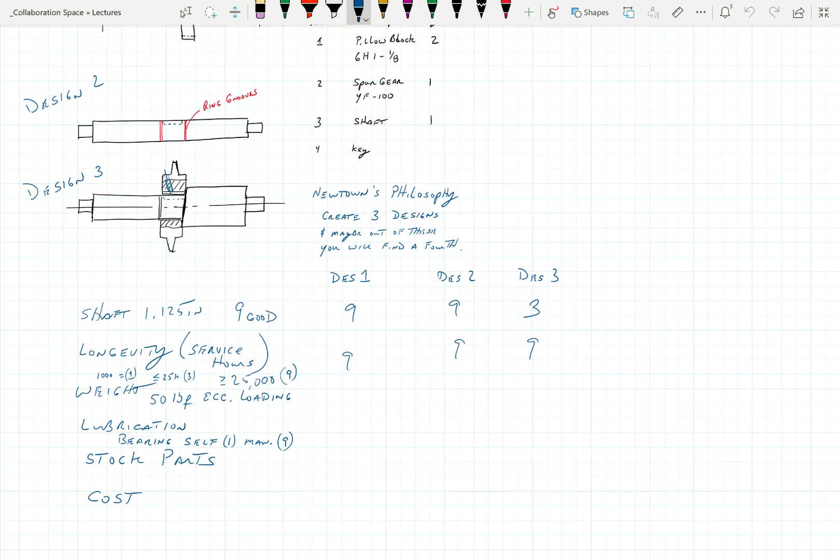But in order to evaluate which design I'm going to go with, I use decision matrices to do it. And believe it or not, Corning Glass has a really interesting one they use - their chief engineer showed it to me one day, and it's cool.

Weight - did they all handle 50 pounds? Okay. Lubrication - we chose bearings that were going to be manually lubricated, right? Yeah.

Stock part - this is all stock, right? Yep. Okay, so now I'm stuck between design 1 and design 2.

And truthfully, there's got to be some more categories in here, but I'm missing them. I would add another category for ease of manufacturability.

Shaft 1 is really easy to machine - just a straight shaft, stick a piece of rod in it and call it done. Maybe cut a keyway in it. Design 2, we got to machine both ends.

And then design 3, well, we got more machining, but we get a much more rigid support for the gear. So that might be another category that we would add. Or I guess that would be under longevity to some extent.

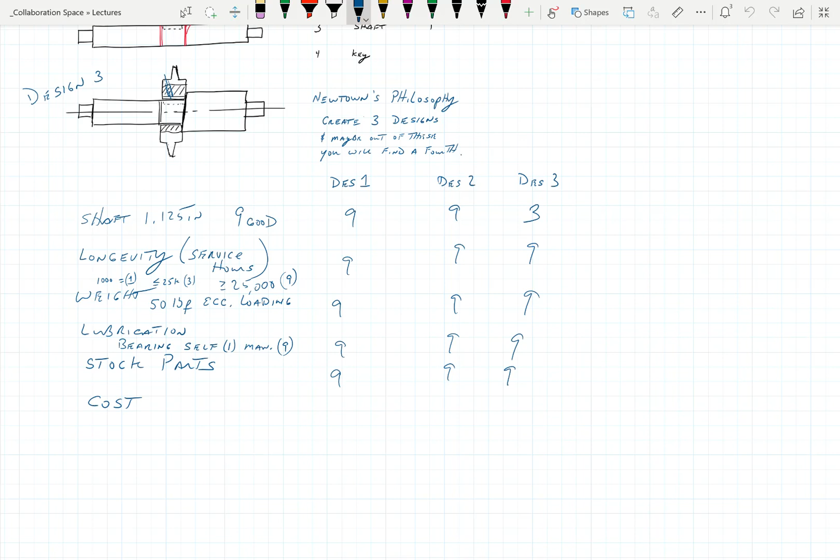Well, all right, so let's talk a little bit about the process of machining here. And don't let me go over time today because I've got to go up to the president's office at 3.

You got 3 minutes. Well, yeah - no, I got to walk all the way across, plus I got to go to the office and pick up my stuff. So maybe an extra 10 minutes.

So on design 1, I don't do anything other than make sure it's the right diameter. And maybe put the groove in for the key, so the keyway gets put in. All right, really cut it off, face the ends off so I've got a nice end.

Put a bevel on it on each end so they're not sharp, and then take it to the milling machine and cut the groove for the keyway. So literally 4 processes: cut, face, bevel, slot. Throw it in the bin for the next one. Okay, right.

This requires me to take a cut, face both ends off on a piece of metal, step down one end, step over, and do the ring groove. Then I do the other ring groove, and then I've got to turn the part around and put it in another machine, or turn it around in the same machine and face the other end off, which is perfectly fine. Or it could be this.

I cut this end off, I've got a long rod sticking out of the machine. I face this, I cut the groove, I cut the ring, but each time I cut that, the machine advances the part further up. And there's a part rest out here someplace in the process that holds up the end of the shaft.